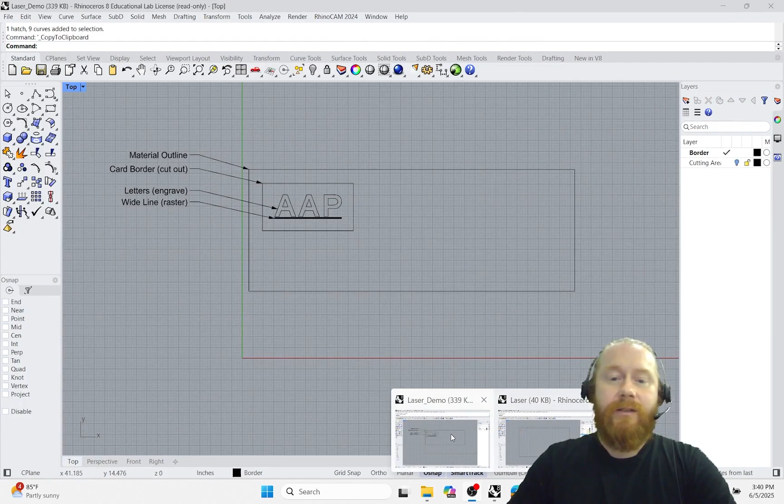Hey everyone, Kurt here. I'm going to walk through the process of preparing your file and sending it to the laser cutter using Rhino. I'm working on the desktop of our laser cutter number 3, and I have a few files already open. One is the template file in Rhino, which is on the desktop of the laser cutter computer. The other is my file that I prepared in Rhino prior to coming to the lab. And lastly I have our laser settings PDF, also located on the desktop of the laser computer.

First, I will go to the template file. There are some test circles in here. We can go ahead, select those, and delete them.

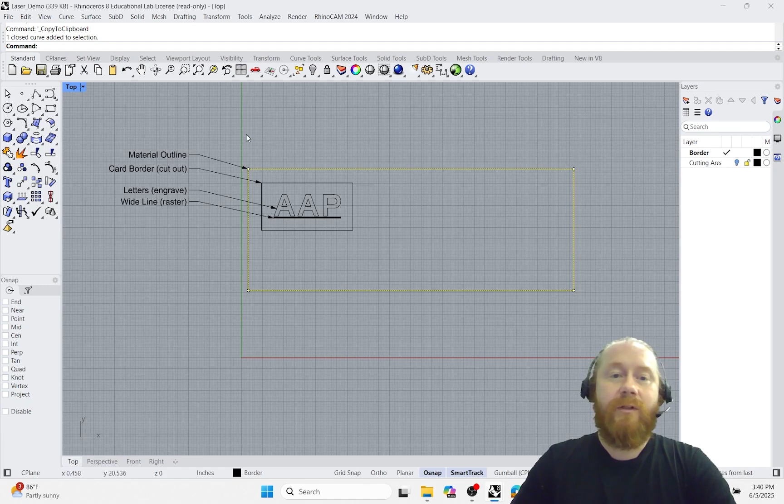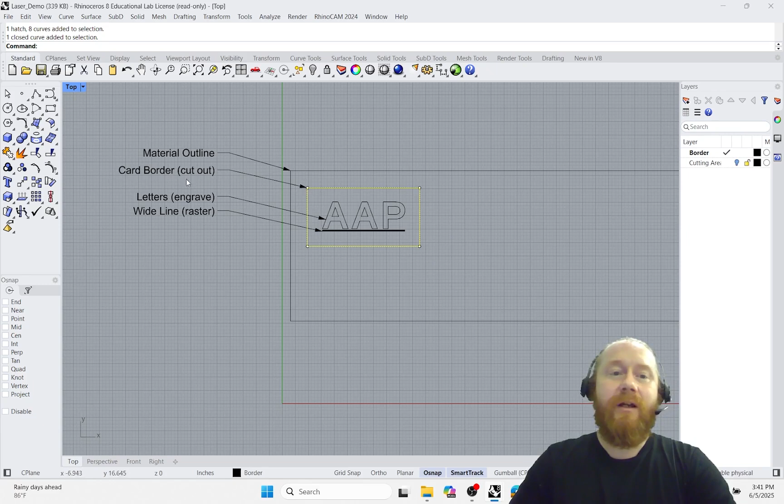Then I'll go back to my file. You can see here I have a line that represents the material outline - this is the outline of the cardboard I'm cutting my parts out of, the exact size and shape of the material I have. I'm going to be cutting out this geometry, a card with some letters on it. This line represents the border of my card that will be cut all the way out of the sheet of cardboard. And on that card, there are letters that will be engraved, and underneath those letters is a wide line that I will raster engrave.

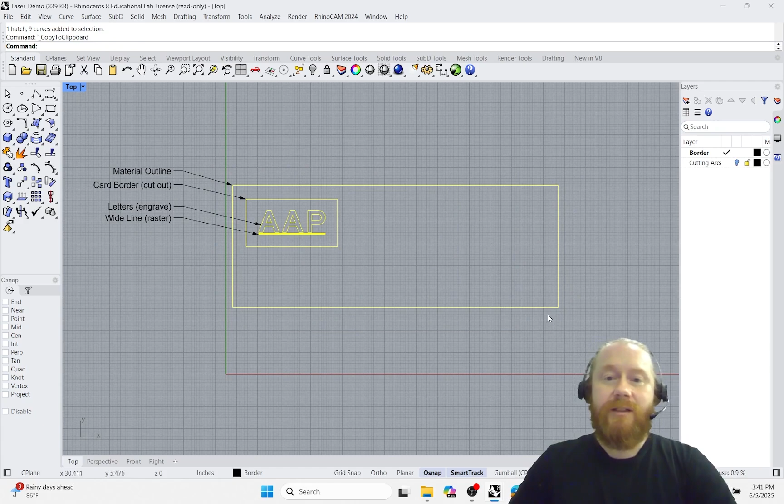Next, I'll select my geometry. I'm going to do Control C to copy that. I'm going to navigate back to the template file and do Control V to paste that geometry in.

Now I want to use the Move command, and I'm going to select the top left corner of my material, and move that up to the top left corner to align it with the top left corner of the border of the laser cutter. This is where I'm going to physically place my material when I load it into the laser cutter as well.

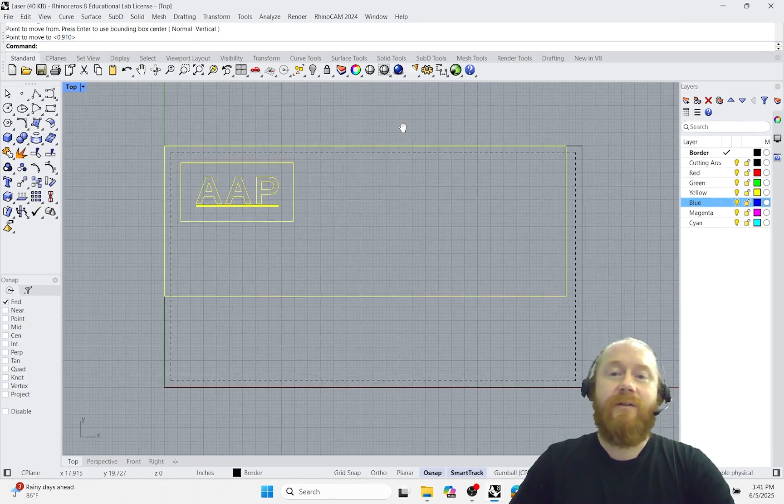There's a dotted line here - that's just a reference. We don't want to put our parts too close to the border of the laser cutter. We generally want to keep it within that dotted line.

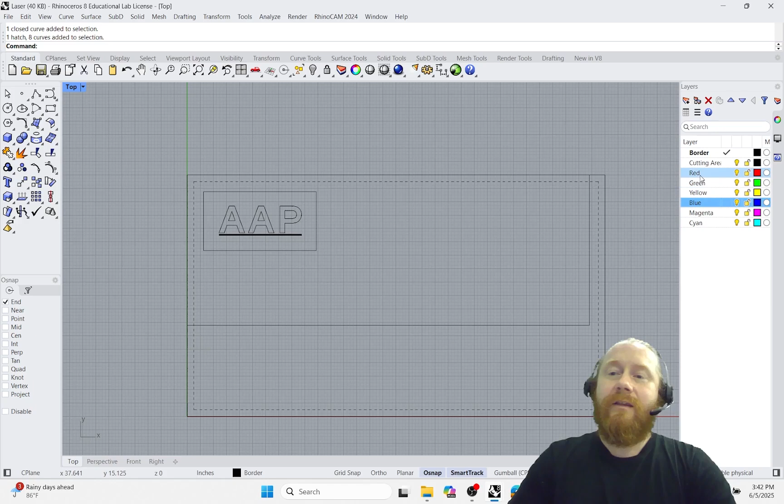Next, we need to assign our colors. The template file has layers set up with the colors that the laser cutter can read. If you use a color that's not over here, the laser won't be able to read it, and it won't show up when you try to send your artwork to the laser cutter. It doesn't matter which colors we use, but we need a different color for each operation, and the laser will generally go in order from top to bottom as they're displayed here.

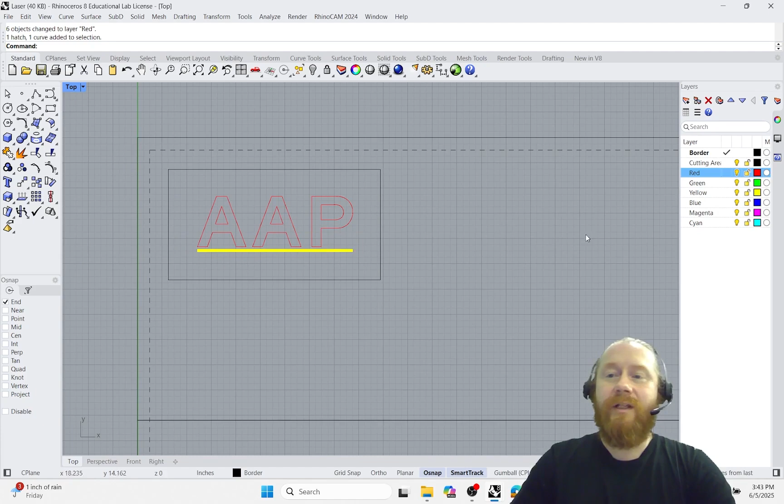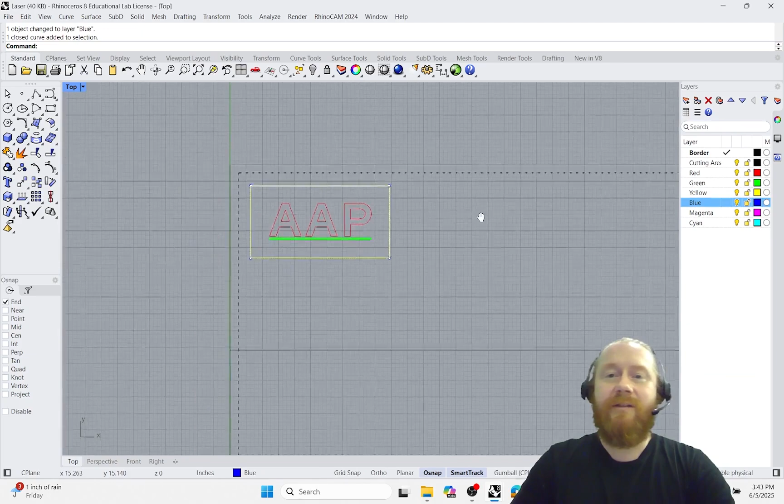So the first thing I want to cut is my letters. I'm going to select the letters, then right mouse on the red layer and say change object layer to make my letters red. The next thing we will cut is the wide line underneath, and I'll assign that to the green layer. Finally, for my cutout line, I'm going to assign that to the blue layer, just because the yellow color is the same color that Rhino uses to show that something's selected, and that can get confusing sometimes.

Now that that's done, we can go up to File, Print. This is going to open the Print dialog menu. The first thing we'll do is scroll down to set the window of our print area. It is already selected here, but I'll go through the process to show you how to change or set that. So we want to click the Set button.

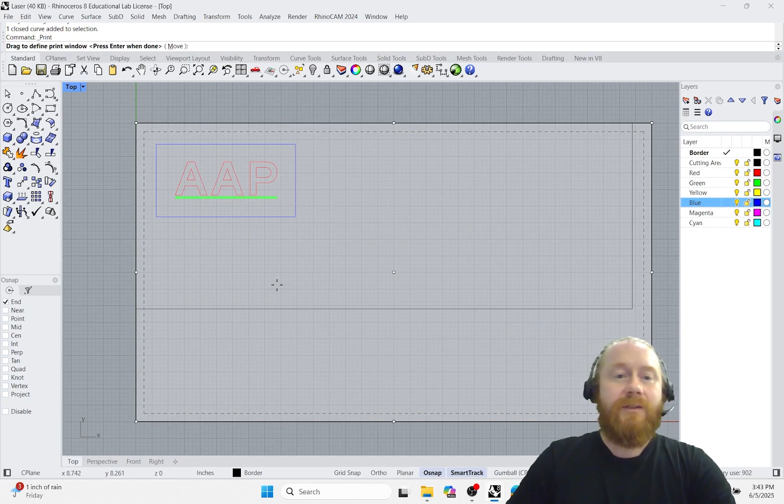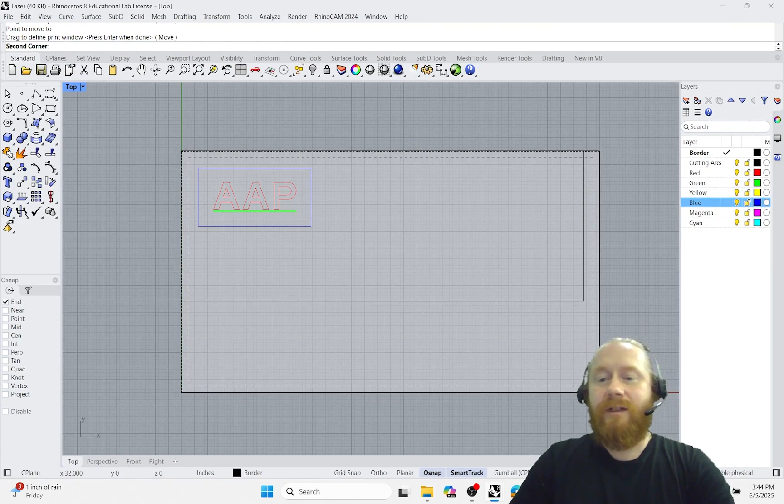I'm going to drag this out of the way just to show you how to set the window. It's pretty simple - we will just left mouse click to snap to the corner of the laser cutter border, then drag and left mouse click the bottom right corner. Once you click, it's going to ask you if you want to change the scale to fit the window area. You can say no here. Now the window is set, and we can right mouse or click enter on the keyboard to set the window.

From here we want to scroll down and verify that the scale is 1:1 here, which it is. Now we'll go back up to this properties menu. So we'll click properties - this is the laser cutter properties dialog. You can see all our colors in here.

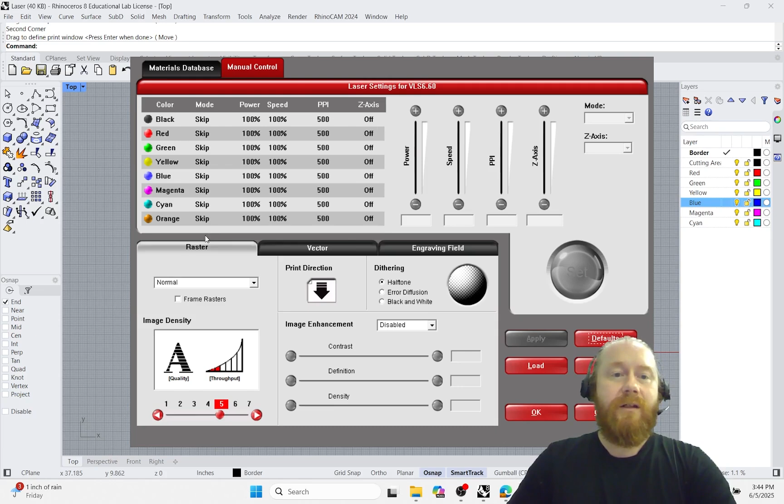I'm going to start by clicking on the red to select that. You can see that we have some settings here - we have the mode, the power, and the speed. We need to set those for each of the colors that we're using. For the red layer, the letters that we're going to engrave, we're going to set the mode to vect, for vector.

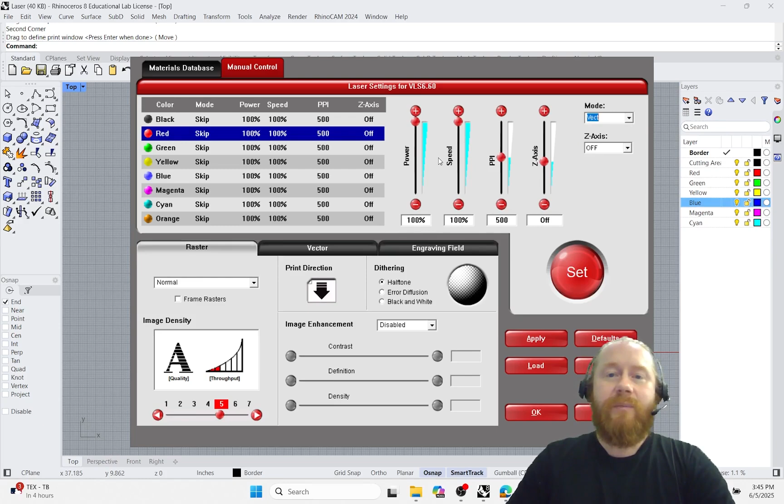And then for the power and speed, we're going to go down to our material settings PDF. As I mentioned, I'm cutting cardboard, so I'll scroll down to corrugated cardboard. For the letters, I want to use a heavy score, and you can see the power and speed listed here is 40 for power, 60 for speed. Keep in mind these settings are just a guideline, and generally you should do some test cuts before you send your final file to the laser cutter.

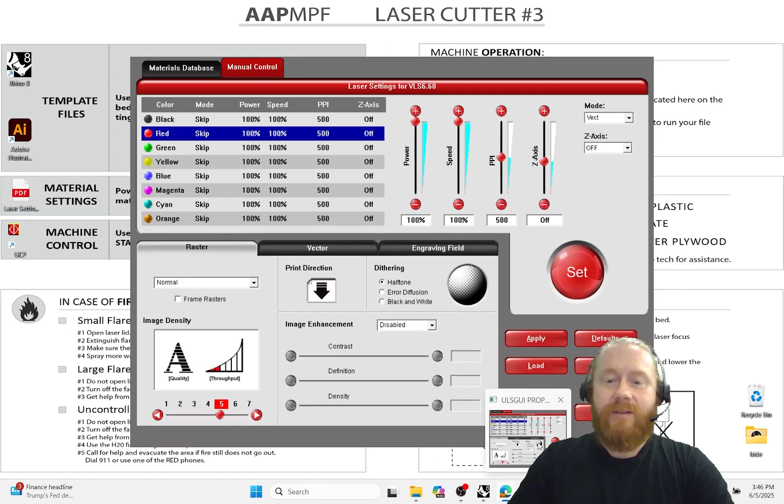Now I'll navigate back to the dialog window, and I'll use a power of 40 and a speed of 60. The last thing we need to do is click set to get those to stay.

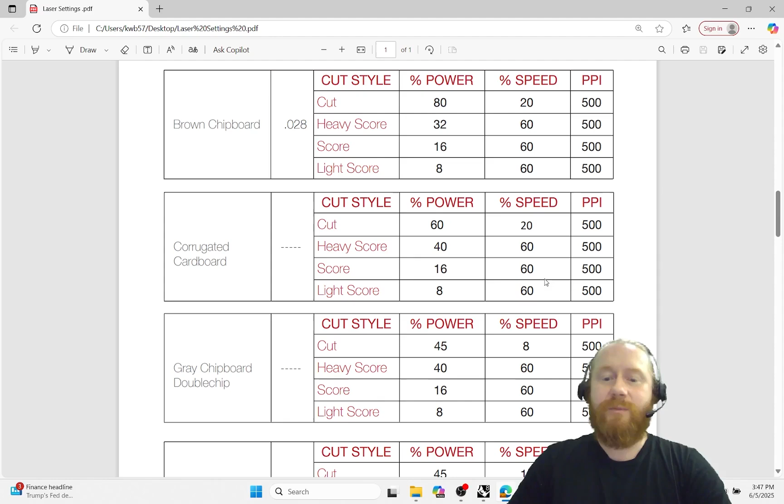The next color we're using is the green, and if you remember, this is our wide cut layer. Because this area is wider than the laser beam, we need to assign this to the raster mode, and that will tell the laser to make multiple passes over this area. I'll go back to our settings, and for this area I'm going to do a regular score, so the power is 16 and the speed is 60.

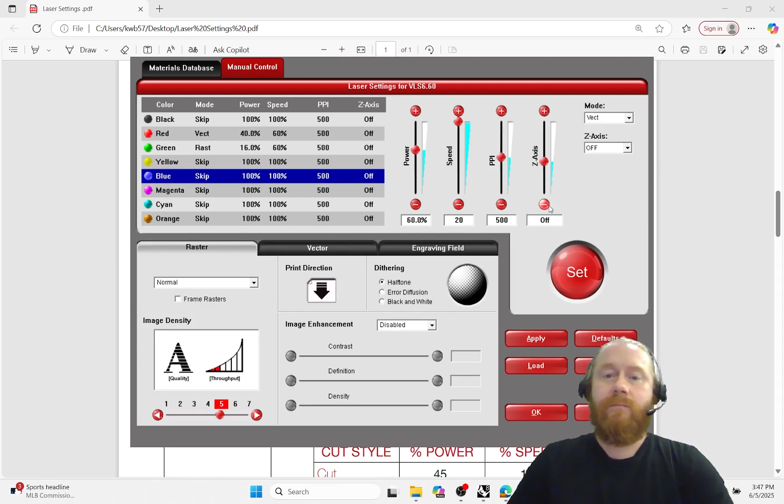And lastly, for our blue cutout layer, the mode for that will be vector again. We can see here we have a power of 60 and a speed of 20 for the cut. We'll click set. Now we can click OK.

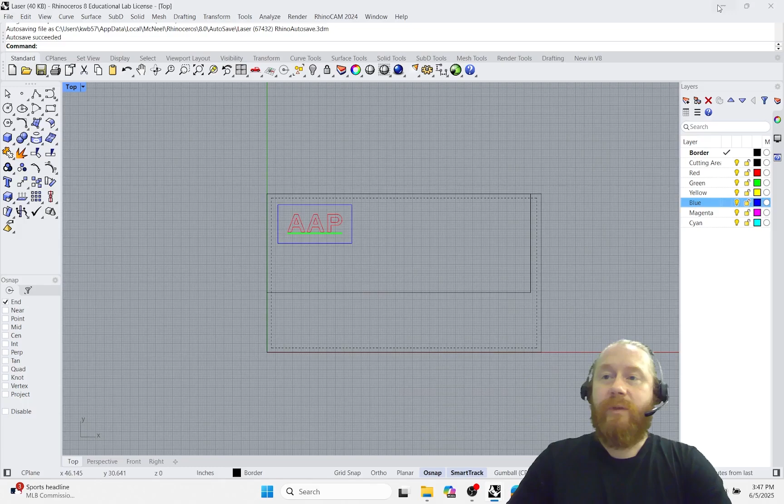That will bring us back to the print dialog window. You'll notice that orientation has changed, so if we go to orientation, we can select portrait, and this is how it should appear. Now we can click print, and we will minimize all our windows.

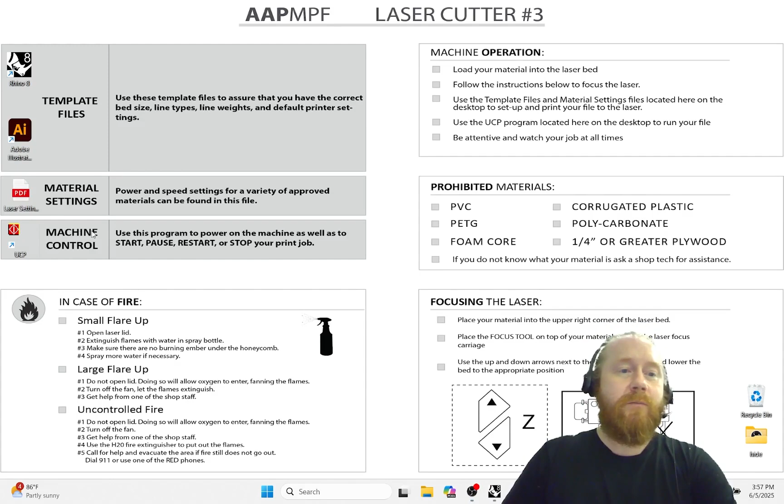On the desktop of the machine, we want to go to this UCP machine control program, so we can double click that to open it. You can see our artwork here. The buttons right now are grayed out.

That's because we need to turn the laser on, so we can click the power button here to do that. When the laser first turns on, it's going to say initializing down here in the bottom corner. Once that process is done, it should say idle. So it says idle, and you can see our buttons are all illuminated now.

It's good practice here to click the home XY button, just to make sure that the laser cutter is properly homed.

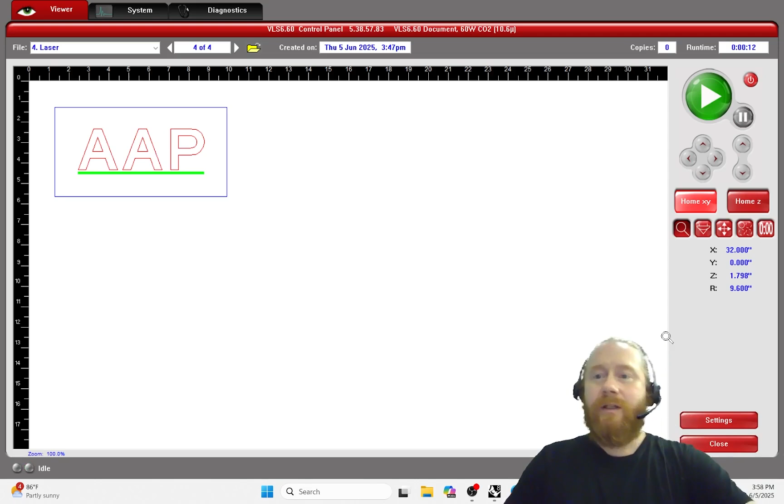The last thing that we need to do before we start cutting is focus the laser using our focus tool here. The process for that does involve the UCP. We will click the focus view button here, and with that selected, when we move the cursor out over the artboard, you can see these crosshairs, and we can click in a specific location, and that will bring the carriage out to that area where we can finish focusing the laser at the laser cutter. For instructions on how to do that, see our video on machine setup for laser cutting.

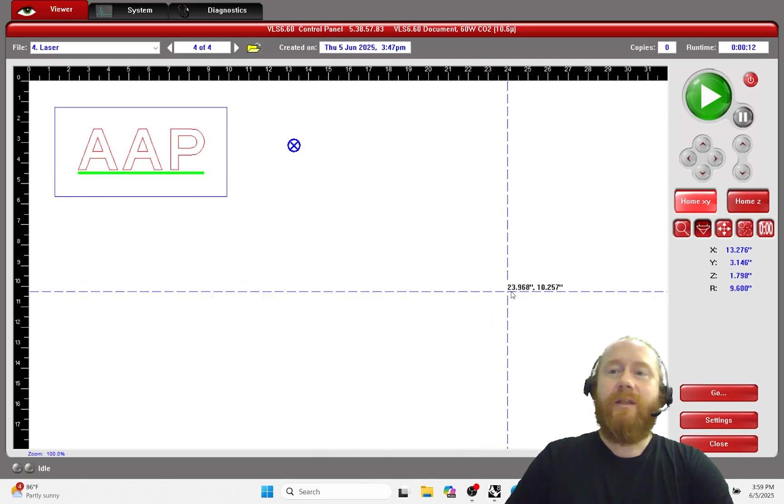Once the laser is focused, we can go ahead and click the play button here. This will start the laser engraving. Notice that the buttons are grayed out.

To stop the machine at this point, we can go ahead and click the pause button. It will take the machine a few seconds to finish pausing. Once it's done though, you can see the pause button will change to a resume button.

It's really important that when the laser cutter is operating, you stay in the lab the whole time and oversee the operation of the laser cutter. Parts can catch on fire pretty easily, especially with materials like cardboard. If for some reason you need to leave the lab, you need to use that pause button, and then when you get back, you can press the resume button to continue your file where it left off. You want to be careful not to press play, as that would start the file from the beginning, and generally that's not desirable.

That's all the steps for preparing your file and sending it to the laser cutter. Thanks for watching, and good luck laser cutting.